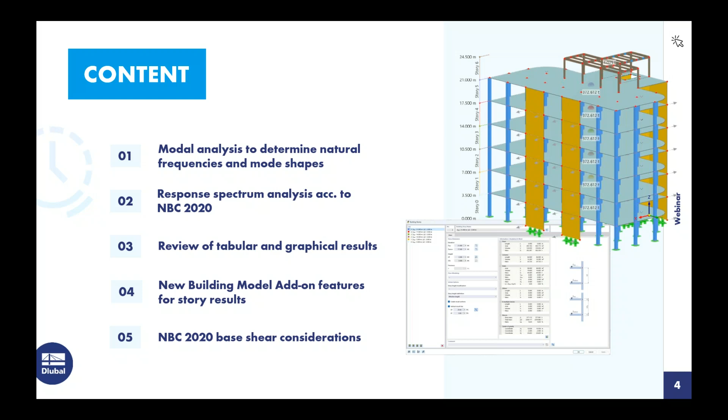And finally, at the end, we will consider the base shear requirements from the NBC 2020 and see how those are related to RFEM 6 and the result output. So before we begin, I want to discuss the NBC 2020 earthquake methods of analysis that are given in Article 4.1.8.7. So we do have the equivalent static force procedure that is provided in 4.1.8.11, and this is certainly a simplified approach for seismic design. Now, this can be applied for buildings that are of seismic category SC1 or SC2, given in Table 4.1.8.5.B.

It also can be applied to regular structures with a height less than 60 meters and a fundamental lateral period less than 2 seconds. We can also apply this simplified approach for irregular structures, and we would refer to Table 4.1.8.6 to see what categorizes a structure as irregular. But the height must be less than 20 meters, and that fundamental lateral period must be less than 0.5 seconds.

Then we have the dynamic analysis procedure in 4.1.8.12, and this includes the response spectrum method, the time history method, or the nonlinear dynamic analysis. And this should really be applied to all structures that do not satisfy the simplified requirements set forth in Article 4.1.8.7. For today, we'll move forward with the response spectrum method for our structure.

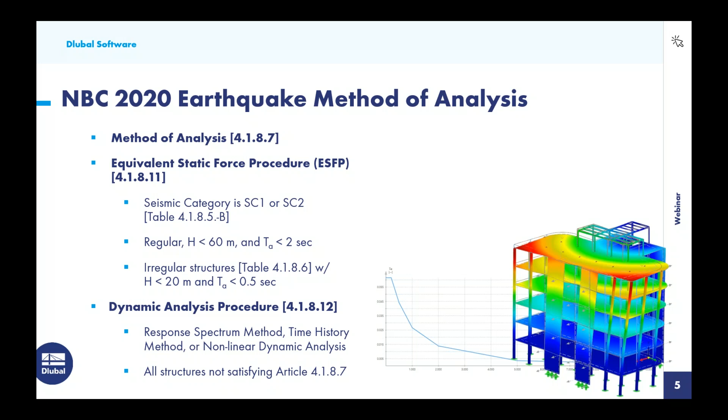So we'll begin in RFEM here, where I have already modeled our multi-level story structure. So we'll quickly go over a bit of the model input as shown over here in the RFEM 6 navigator on the left. So we can see our input materials, and a majority of the structure is defined here as a concrete material with a compressive strength of 40 MPa. But we also have a small steel structure up at the roof level here with a material of A992 steel.

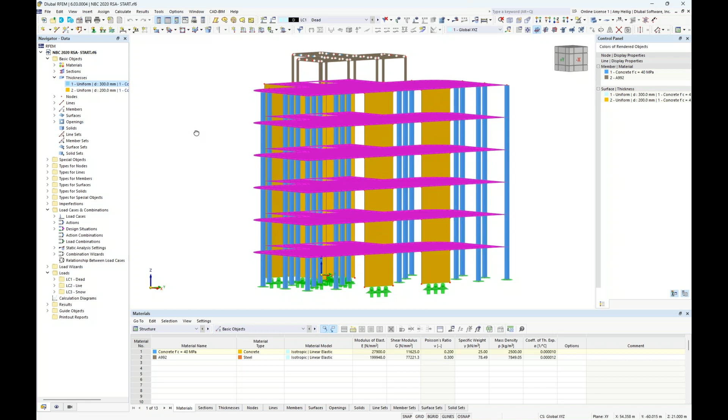As far as our cross sections, you'll notice that our concrete columns that are spanning between floors are just going to be square 350 millimeter by 350 millimeter concrete rectangular sections. And then as far as our steel members, we have several W shapes defined directly from the RFEM 6 CSA library. And finally, we have the thicknesses defined of our surfaces. So this would include our floor slabs here, which are defined with a 300 millimeter thickness. And then we have the thickness of all of our shear walls, which are going to be defined with a slightly smaller thickness of 200 millimeters.

So that's just a basic overview of the structure, but we would also like to take a quick look at the applied loading that, again, I've already added to this particular model. So within our dropdown, we have three simple load cases, all gravity loads. The first is going to be our dead load, and this is going to be a surface area load of 3.5 kilonewtons per meter squared applied at every level.

We also have a live load, with a modified magnitude here of 2 kilonewtons per meter squared, again applied at every floor level. And finally, we have just a general snow load at the top level here of 1.5 kilonewtons per meter squared. So now that we have reviewed the overall structure and the loading, we want to move forward now with our modal analysis.

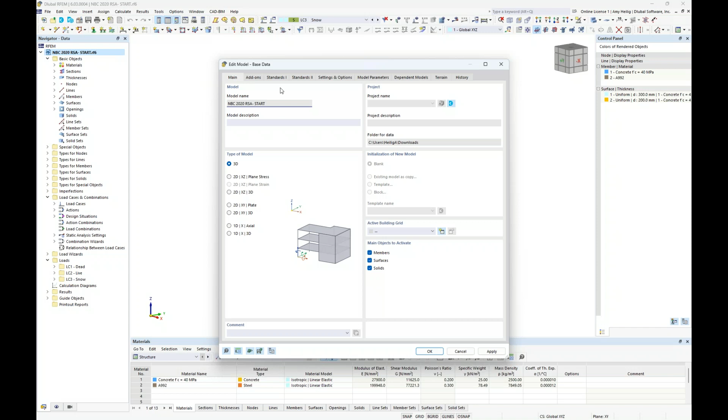So we want to right-click on the model name here in the project navigator to visit what's called the base data dialog box. And this dialog box would be presented to you when you first create a new model within RFEM. But on the second tab are all of our optional add-ons.

So to quickly explain the configuration of RFEM, the base program itself allows us to fully model the structure, including all of the materials and cross sections from the library. We can apply loads and run a basic static analysis. But the minute we want to move forward with design according to the various standards, we would activate one of these add-ons, for example, concrete design, steel design, timber design, and so on. And in particular, today, we want to activate our dynamic analysis add-ons, and we'll begin with the modal analysis.

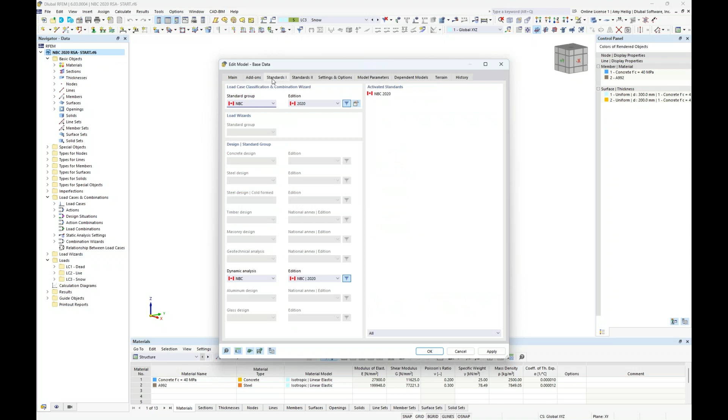So on the third tab, we will generate our load combinations automatically according to the NBC 2020, but we see all of the relevant international standards that are available in the base program as well. And because we have activated now that dynamic analysis add-on, we will go ahead and reference the NBC 2020 here.

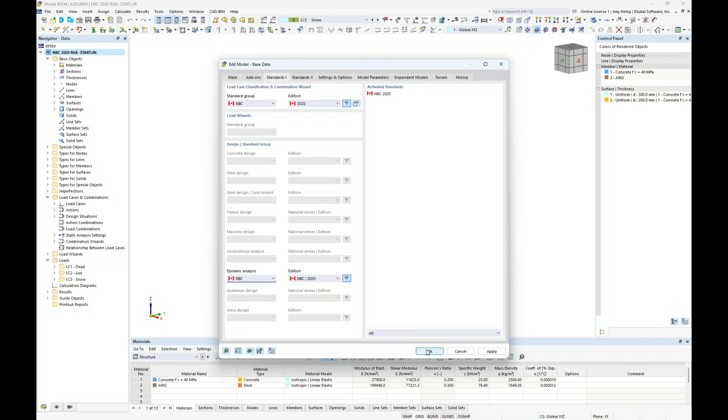So once we have activated that add-on, we will go back into the program and we want to visit our load cases and combinations dialog box. Well, we can immediately pull that up here by editing the active load case. And again, under the load cases tab, we see those 3 simple load cases that we just reviewed, dead, live, and snow, but we're going to create a 4th load case. And the load case name is going to be modal analysis.

Now, because we have activated that add-on, you will notice here that within the dropdown, we now have a new analysis type called modal analysis. And this is only available because we have activated that add-on. So you'll also see a lot of these settings immediately modify in comparison to the static analysis. The first thing to take a look at is the modal analysis settings. So we'll go into the edit dialog box here and we have a couple default options.

The first input is the method for determining the number of modes. So this is by default set to user defined, where we can directly put in the number of mode shapes we would like to solve for. And for today, I'm going to increase this to 10, but you can solve for 10, 20, 50, 100 different modes if you prefer. The alternative method in this dropdown is automatic to reach a maximum natural frequency. So you'll notice that we can input the maximum natural frequency and the program will determine the number of modes needed to reach that particular value.

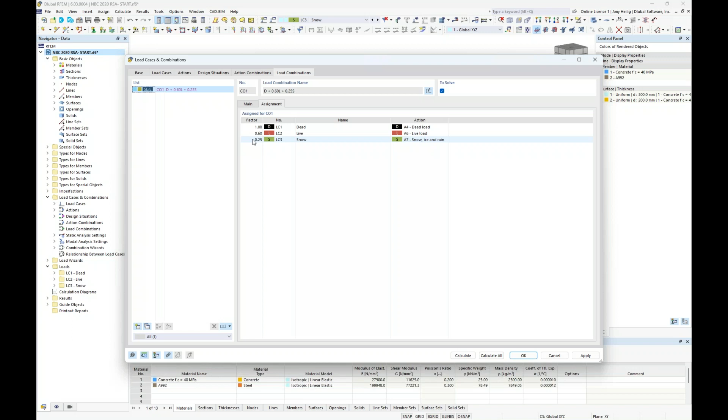And now when we jump to the load combinations, we will see all three load cases considered with the relevant factors directly from the NBC. So 100% of the dead, 60% of the live, and 25% of the snow. So jumping back to our load cases and under the modal analysis, we can now use our drop-down box here to select that mass combination. So now these relevant load cases will be converted to mass.

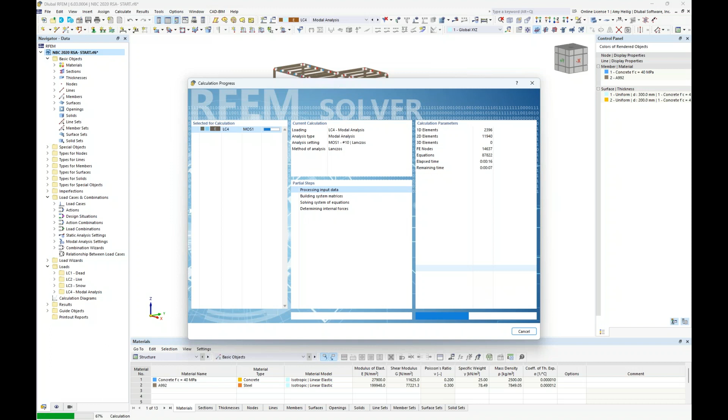Okay, we're now ready to run the calculation, so we can simply hit calculate under this particular load case modal analysis. The program will generate our FE mesh for us, and we are going to calculate a total of 10 different mode shapes. Remember, this is the input that we have input into the particular modal analysis settings. We will also consider the mass conversion of the particular mass combination that we have also set.

So when that calculation is done running, we can take a look at our results. And over on the left, we now have a fourth tab available in the navigator. And within our dropdown, we see here 10 different mode shapes that we can actually cycle through to see the response here of the structure.

So currently we're viewing the mode shape, and notice at the very bottom here, we have the ability to scale the mode shapes. Now the default option is set here so that the magnitude of the mode shape vector is set to a value of 1.0. That's why we see a max value here of 1.0.

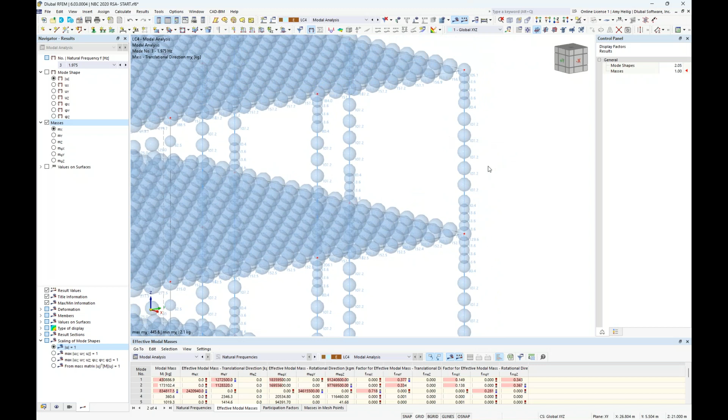But there are some different options we can easily toggle to if we prefer, but most likely we'll be utilizing this first option. So in addition to viewing the mode shape here, you'll also notice the ability to take a look at the masses on the structure used for this modal analysis. And if I zoom in here, we can actually see the mass magnitude at every single FE mesh point that was used in this calculation for our members, our floor slabs, and also our shear walls.

So in addition to the graphical output, we certainly want to visit the tabular output here. So once this calculation is complete, we should also see the ability within our dropdown to jump to the modal analysis add-on to view our results here. And the first tab under the natural frequencies includes those 10 different mode shapes as well. So we can kind of cycle through these by clicking in the table, and notice the graphics will automatically update.

But this allows us to view the angular frequency, the natural frequency, and the natural period of our structure for those 10 different modes. Now, it's really important to also take a look at the effective modal masses. And within this is going to show us our mass participation for each mode shape. Well, we can immediately tell what our dominant modes are here, just based on the most mass participation. So mode shape 1 would be our dominant mode in the Y direction. And we can also view mode shape 3 here, which would be our dominant mode in the X direction.

And down at the bottom of this table, we will actually get a summation here of the mass participation. So in the X direction, we have 72%, and in the Y direction, we have 89%. Well, if we refer to the NBC commentary, and currently only the 2015 is released, we don't have access yet to the 2020, but I would imagine it would say the same thing, in that a 90% mass participation is required for this modal analysis. And we're certainly not reaching that with these 10 different mode shapes here.

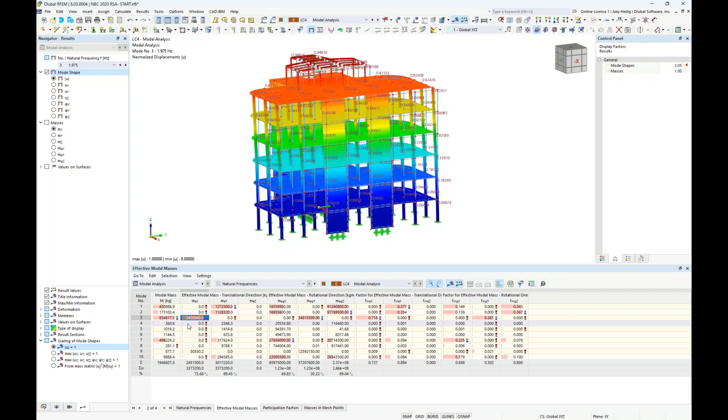So the question might be, well, what steps can we take in order to ensure that we're meeting that 90%? The obvious and most easy is probably just to solve for more eigenvalues. Maybe we set this to 20 or 30 in order to see at least that 90% in both orthogonal directions. Alternatively, if we take a look here at mode shape number 4, for example, you'll notice that really not much is going on with a majority of the structure. Rather, we're seeing a response up here for these smaller steel members only.

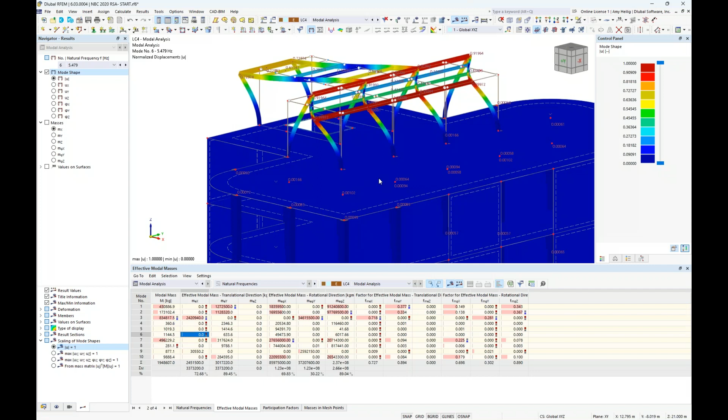Same concept with mode shape number 5 and mode shape number 6. So we term these usually as local modes, where again, not much mass participation, but we're seeing very little response for just maybe a few members. So I'd really like to eliminate these local modes in my calculation. And we're going to go back to the modal analysis here and revisit these settings.

Under the Settings tab, remember we have this currently set to no neglection, but what I would like to modify this to is to user defined, where I now have an additional third tab here to neglect masses of a particular object that I select within this dropdown. And for today, I'm going to deactivate the masses for all of my steel members located at that top level.

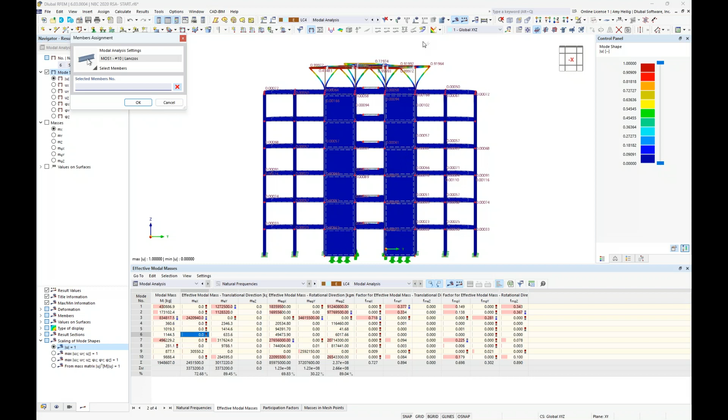And I can graphically select the steel members here. I'll turn off my results. Maybe I turn this into a rendered view by graphically using my selection box here to highlight all of the steel members. Now notice the member numbers are automatically populated. So now we're going to completely neglect the masses for those particular elements.

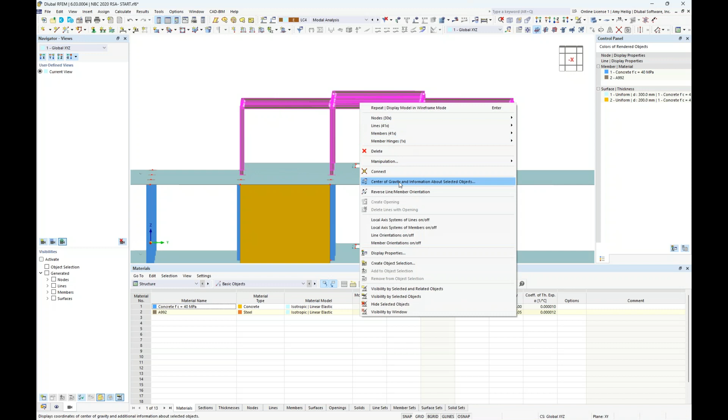But if we would still like to consider the masses and maybe just redistribute to a different area of the structure, we can do so. So if I highlight all of these same members, again, these steel elements up at the top, I can right click to take advantage of this option here called center of gravity and information about selected objects. And what you will notice is that the program will give me the total mass here of the selected objects, 3.075 tons.

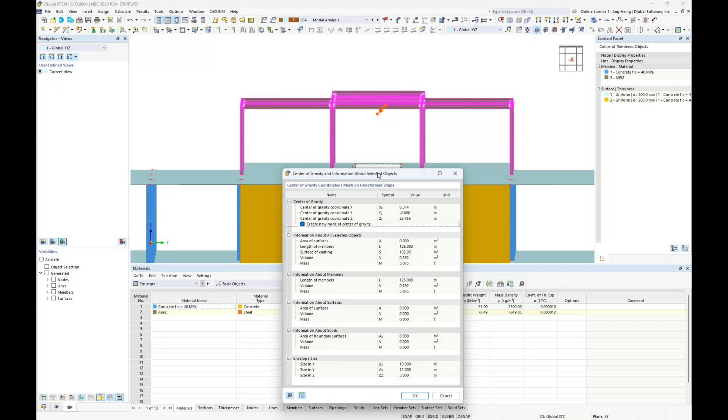Well, I can take this a step further to generate a new node at the center of gravity with the selected objects, and we see that generated here in the background. So once I've created that additional node, I'm actually going to double click on it because I want to modify the Z elevation here to 21 meters. And by doing so, I just have simply moved this node to the top story here of the concrete structure itself.

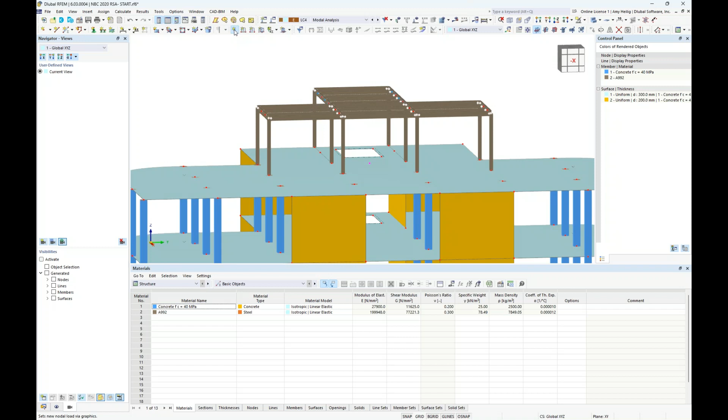Well, now we are going to apply a new nodal load. So I choose my option directly up here in my quick tools up at the top. And instead of the load type set to the standard force, we do have the ability to set a mass load type. And again, taking into consideration the total mass of those selected steel objects, I'm going to simply redistribute it here at 3.075 tons.

And I'm going to apply it to node number 491, or we could graphically select that node. But we do need to make sure that we are under the relevant load case here. So we want to apply that to the dead load case. So when I click OK, the program asks me to delete the results, and we turn this into a rendered view here. And now we see that mass load applied directly to that node, again, at that top slab here

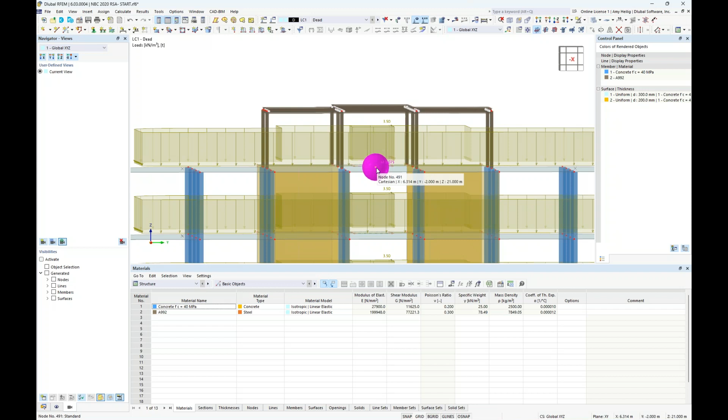of our concrete structure. So we have the ability to apply mass loading as nodal loads, as we just saw, or line loads, member loads, or surface loads to be considered further within the modal analysis directly. So we jump back down here to the modal analysis.

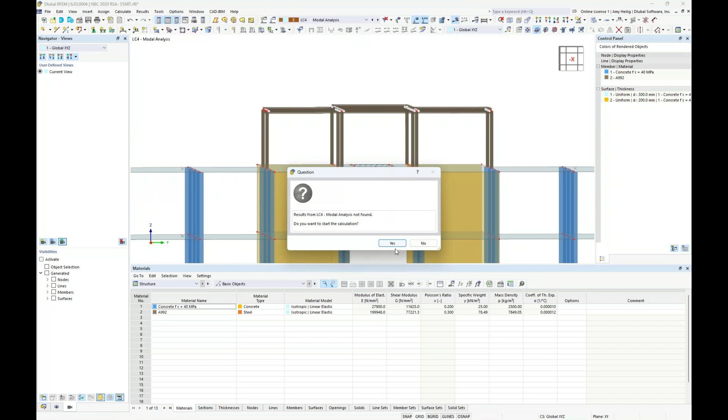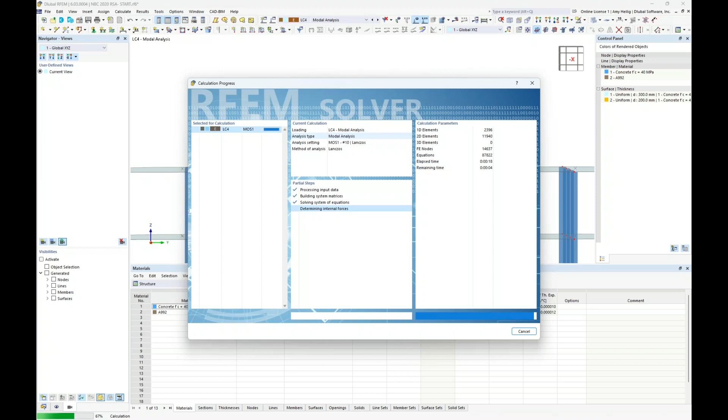We're going to rerun this calculation, and remember now that we are completely neglecting the masses from the steel members, but rather we have now inserted that single point mass load at the top of the concrete structure to simply redistribute the mass. And our hope is by still solving for 10 different eigenvalues that we see slightly better mass participation. So once the results are finished here, we can go ahead and zoom out to see the overall structure. We're currently looking at the modal analysis add-on and the effective modal masses tab.

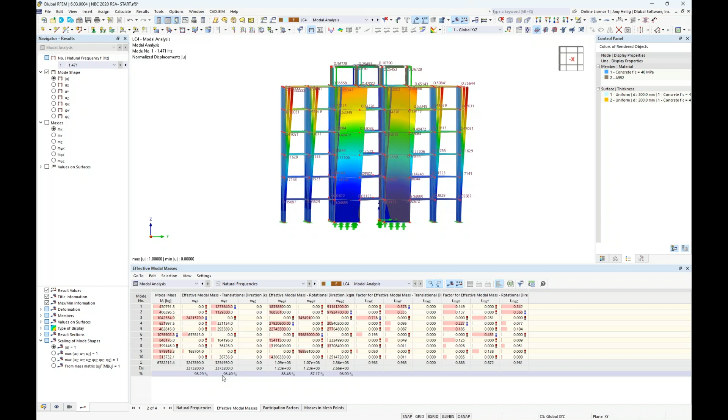And we take a look at the bottom here for the summation of the mass participation. And now we have 96% in the X direction and 96% in the Y. So you can see by eliminating those local modes, we don't need to solve for more eigenvalues, but rather what we see here for mode number 4 and mode number 5, where previously not a whole lot was going on for the rest of the structure, actually look quite good now with a response of the overall structure instead.

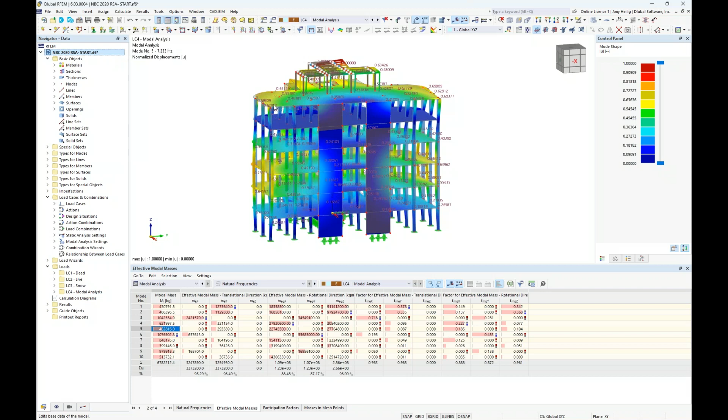Okay, so now that our modal analysis is complete, we have met those 90% mass participation requirements set forth by the NBC. We want to move forward with a response spectrum analysis. So we will go back to the navigator and the first tab here to revisit our base data dialog box. And under the add-ons, you can see that we also have the ability to activate our second add-on, response spectrum analysis. And under the standards, we're making no modifications here.

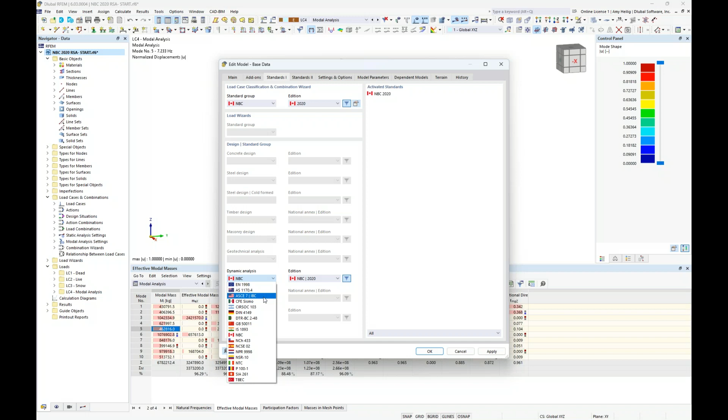We're still running that response spectrum analysis according to the NBC 2020, but I just wanted to point out all of the other international standards that we have available, including the ASCE 7, the Eurocode, and several other international standards. So we'll go ahead and click OK to get back here within the model where we will revisit our load cases and combinations dialog box.

So we will create a fifth load case here, and this one is going to be called RSA for Response Spectrum Analysis Design. Within our drop-down box, we now have a third option available to us, the response spectrum analysis. Now, before I get into some of these settings here on this first tab, I'm going to go ahead and go over the additional tabs.

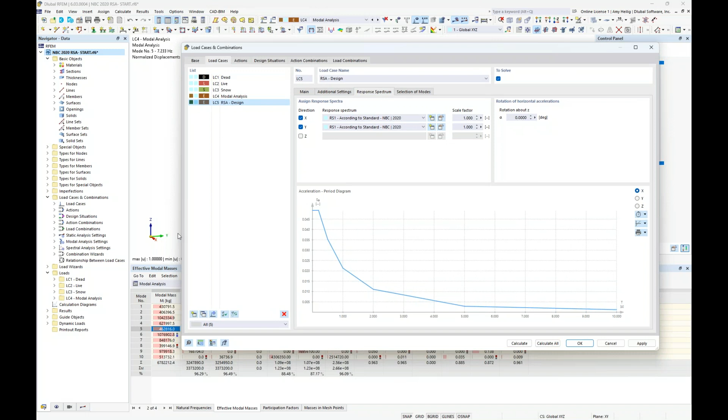As far as additional settings, this is actually not something that you need to worry about with a response spectrum analysis. With that dynamic add-on, it's really more relevant for a static analysis. So we'll go ahead and make no changes here. Under the response spectrum, we are interested in applying this response spectrum in the orthogonal X and Y directions. And this is just based on these global axes here in the background of the RFEM model directly.

Now, of course, if we were also interested in a vertical seismic response spectrum, we would activate the Z direction as well. The program has automatically set a response spectrum definition type here according to the NBC 2020, but we can go ahead and edit the settings within this particular definition type. So as far as generating this response spectrum, we have several options within the dropdown.

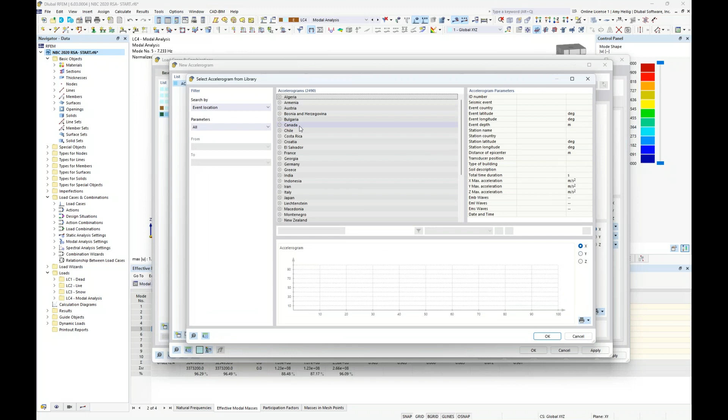The first is user-defined, where notice that you can input directly the period, the frequency, the acceleration, and this diagram will be automatically created based on this input. Alternatively, we have the ability to consider from an accelerogram. So with the accelerogram, we can take a look at the RFEM library directly, where we have several recorded earthquake events from all the various countries, including Canada here. So we could select one of these particular accelerograms to be considered for our response spectrum analysis.

Now, finally, the last option here is according to the NBC 2020, which is what we'll be moving forward with today. Now, it's very important to note here that under the spectrum type, we have two options, the elastic and the design. We'll actually touch on this at the end of the presentation today, but for now, we want to choose the design spectrum. And once we have set the spectrum type, we do need to input several variables here, including the spectral response acceleration for the various periods.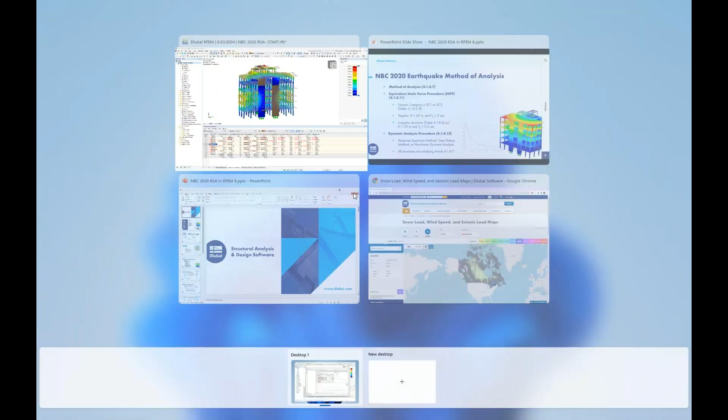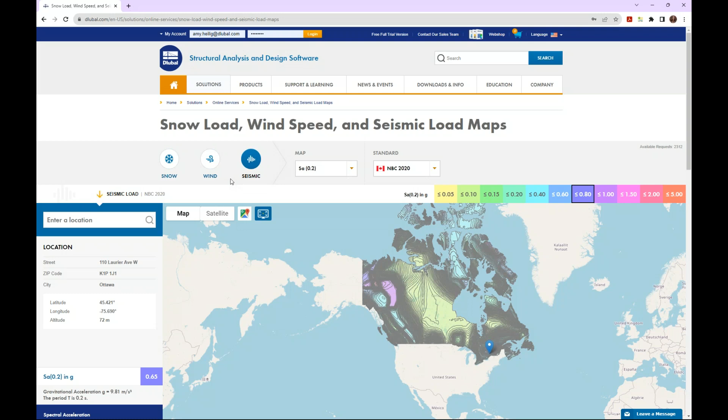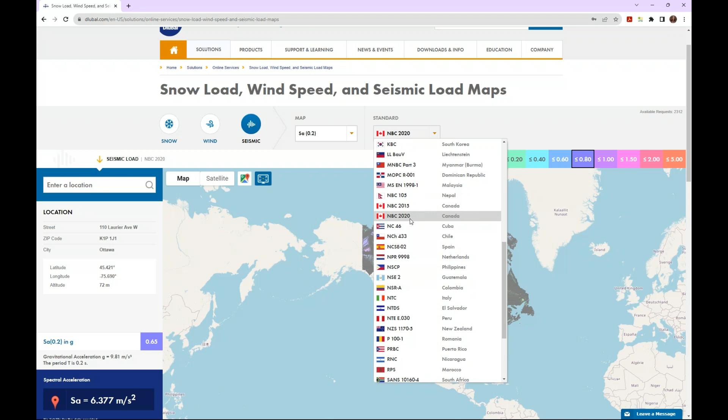Well, I wanted to point out that if you do visit our website at dlubal.com, under solutions, we have what's called the snow, wind, and seismic load maps, or in other words, our geozone tool. So you can see the various hazards that we can select at the top here. And for today, I have selected the seismic. And we also have implemented multiple standards from around the world, including the ASCE 7, of course, the NBC 2020, and all of the rest of the standards available here.

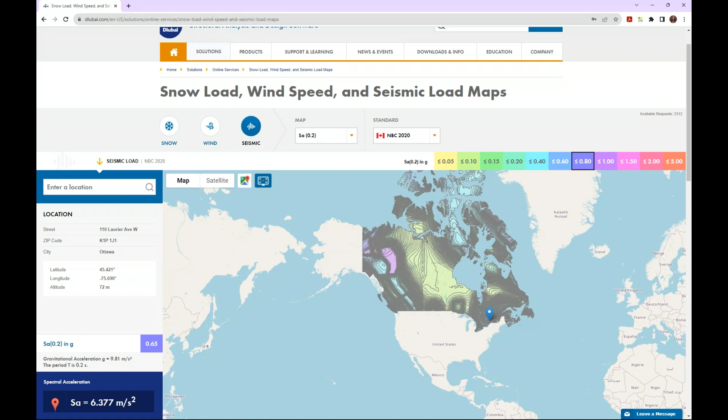So once we have selected our standard, this is also integrated with Google Maps technology in the sense that you can simply input your project location, such as an address or perhaps a city. You can go ahead and select as well within the drop-down these several options that are needed for a response spectrum analysis, and the program will instantaneously return the correct information to you, again, based on the NBC. So maybe a little bit more efficient than flipping through maps. So certainly take a look at this GeoZone tool available on our website.

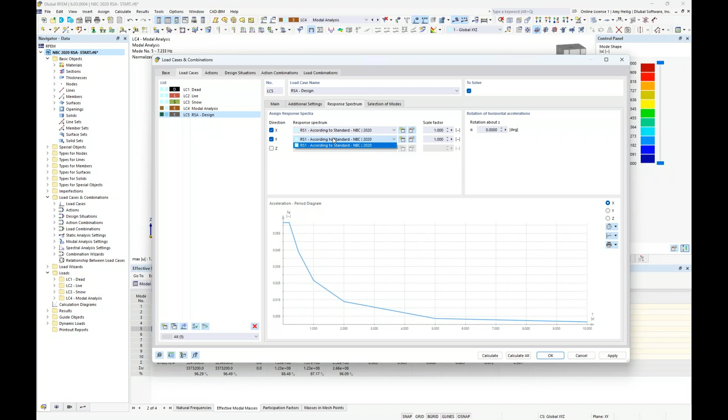So we go ahead and click OK, and we want to ensure that that response spectrum is applied in both the X and the Y directions within this dropdown. The final tab here is the selection of modes. So what you'll see listed are the 10 different eigenvalues that we solve for from the modal analysis. And what's nice is that we also get a nice summary here of the mass participation in the X and Y directions. So 96% in both the X and the Y directions, as we have already taken a look at the previous results back in RFEM.

Well, if we are interested in deactivating some of these mode shapes with very little mass participation, for example, if we set this to 4%, notice that a couple of these modes are deactivated, yet we can still double check to make sure that we're still meeting this 90% requirement, and sure enough, 96% in the X and now 94% in the Y. This just allows us to maybe speed up our calculation quite a bit without having to worry about some of these mode shapes that are not contributing much to the mass participation of the overall structure. So in this case, modes number 8 and 10 will be unchecked here.

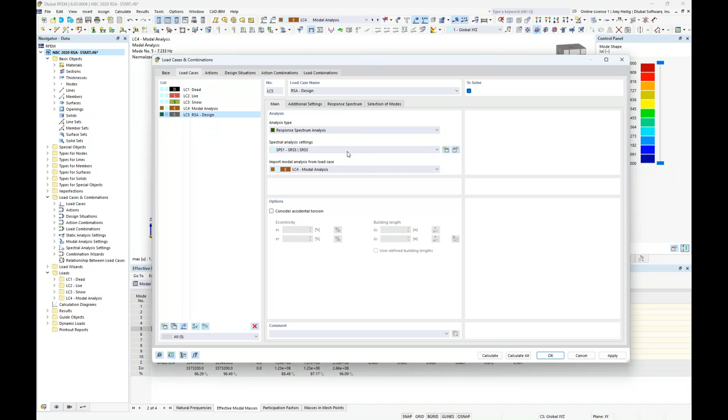So now that we are complete with these additional tabs up at the top, we go back to the main tab to talk about these spectral analysis settings. And again, by default, we do have a definition type set here. This will allow us to set the modal combination method for the periodic responses, and we have 3 different options available. We can take into consideration damping for the CQC rule, and we also will need to set the combination of the directional components, again with 3 different options available here.

So this is a really important topic, therefore I'm going to jump back to the PowerPoint to explain this in more detail. So we'll begin first with the modal combination method, and that's that first drop down available to us. So I'm going to jump ahead here in this PowerPoint to what you would ultimately see in your result output once we do run this response spectrum analysis. So remember that we're solving for 10 different mode shapes, or maybe we've deactivated a couple of those.

So we're going to apply this response spectra analysis in both the X and the Y directions for all mode shapes selected. However, we need to somehow combine these so that we get a single response in the direction X and a single response in the direction Y. And within this dropdown, we choose the method of how these will be combined.

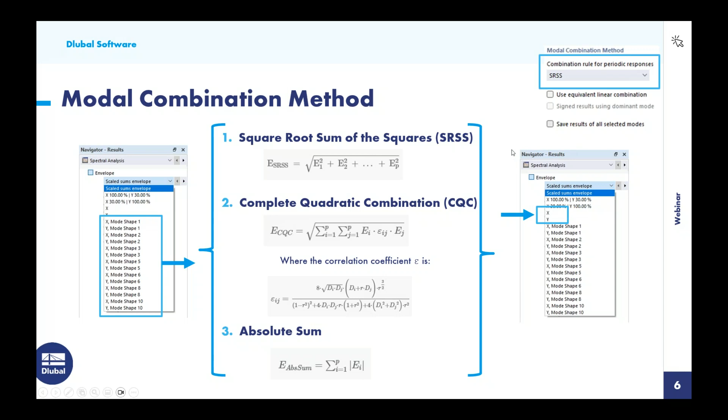So the standard SRSS and CQC combinations, those first 2 methods that we were talking about, inevitably we're going to lose the corresponding internal forces. And what I mean by this is that if we take a look at, for example, a column's max axial force, we'll lose the corresponding moment in the results when we combine these. This is why we have an additional checkbox option right below this called the equivalent linear combination. And this will essentially give us a more realistic result as well as the correct signage.

So taking a look at the square root sum of the squares, SRSS, with this option checked, we see the modified equation shown here. Very similar, we have the CQC with the linear combination checked. Again, we'll see how these formulas vary slightly from the formulas shown on the previous page without the equivalent linear combination activated.

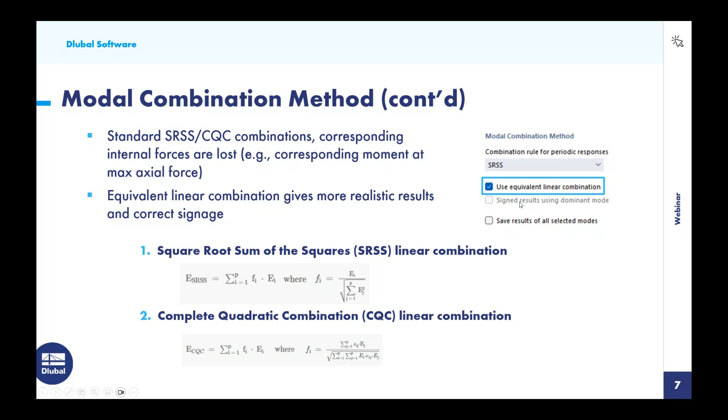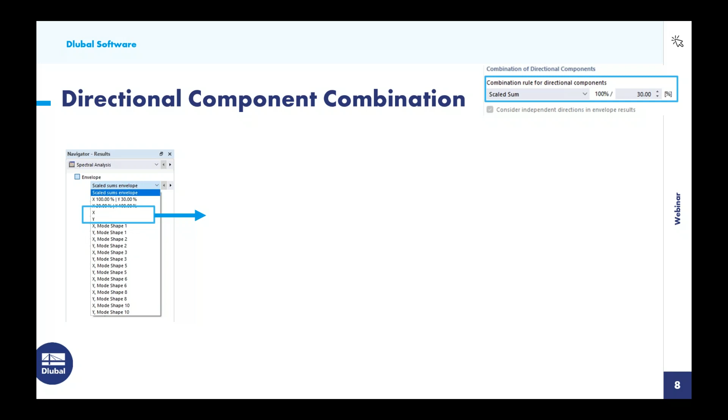And finally, we have our final dropdown within these options for the directional component combination. Well, we now have a single response in the X and a single response in the Y, but we know that earthquake loads don't necessarily always act 100% in the X direction of our structure or 100% in the Y direction, but rather it's usually a combination of both. So the question is, how are we going to further combine these for our eventual design of the structure? And again, we have three different options here.

The first is going to be the SRSS rule once again, where we square them, take the sum, and then take the square root. The second option, and probably the more common approach if we are designing to standards such as the NBC, is the scaled sum or the 100%/30% rule. This is where we are going to consider these independent directions, but we're going to take 100% of the X and add it to 30% of the Y. Now, if we were also considering a vertical seismic in the Z, we would additionally add 30% in the Z. And we'll create a second result here with 30% in the X plus 100% in the Y.

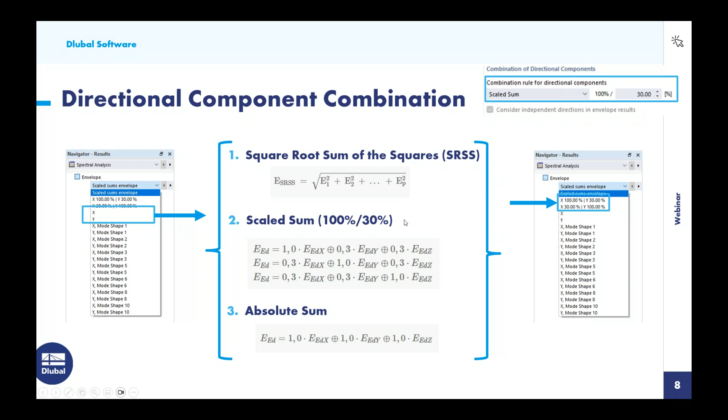Now, the final option for this method is the absolute sum, and this is just simply where we are going to add 100% of the X to 100% of the Y and possibly 100% of the Z. So again, the most conservative approach there. But assuming we move forward with the 100%/30% rule, which is exactly what the NBC calls out if we refer to Article 4.1.8.8.1(c), we should see two results further output in our results for the response spectrum analysis, exactly as we just discussed here, in both orthogonal directions.

Okay, so let us go back to RFEM yet again to choose the combination rule here. Just notice that when we have the CQC selected, we now have the ability to set that damping ratio here on the right-hand side. But today we'll move forward with the SRSS with the equivalent linear combination. Now, the signed results using the dominant mode, this is currently grayed out. We determined that with the way that the response spectrum analysis is carried out, there could be results that are unconservative if we were to apply this method here.

So instead, in the near future, what we plan to do is to explore the option of exporting out the equivalent loads from the seismic response, and then we could certainly take advantage of options such as this for the signed results. But for now, you'll see that disabled.

The save results of all selected modes. Remember, we're combining all of our mode shapes in the X and Y direction according to the SRSS. This just simply allows us to view the structure's results, including deformations, internal forces for each mode shape as well.

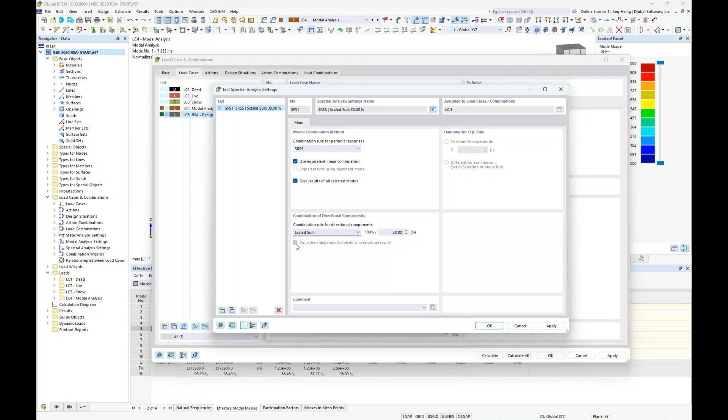The combination of directional components, as mentioned, we will refer to the NBC to set that 100%/30% rule. You see a checkbox activated here in the background. This just means that ultimately in our results, we will give you an envelope solution. So the max and min results for the 100%/30% rule, but we will also consider 100% in the X and 100% in the Y in those envelope results as well. So this is checked by default.

So once we have set this information under these particular settings, we want to import in the modal analysis from the load case. Well, we've only run one modal analysis for today under load case 4, but we could create multiple load cases for different modal analyses, and why this might be beneficial if we were making some experimentations with different mass combinations, neglecting masses, or whatever it may be, we would have the ability here to select a different modal analysis.

And finally, we have the consider accidental torsion. So for this, we refer to the NBC Article 4.1.8.12.4 that tells us we do need to consider accidental torsion in our response spectrum analysis. And we do so by setting here 10% in both the X and the Y directions. And this is based on the building length in both of these orthogonal directions.

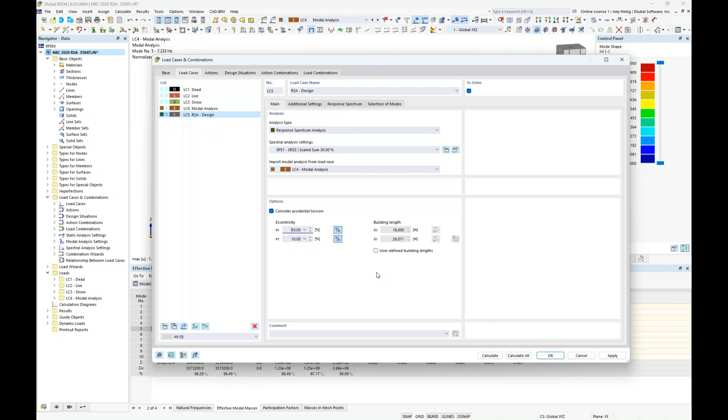And notice the program automatically calculates what this building length is, but if we would like to override that, we could certainly do so. But essentially, internally with our response spectrum analysis results, an additional moment will be applied at every single FE mesh point to consider those code requirements.

So we are now ready to run our calculation once again. You'll notice here that we have several input options that it's solving for load case 5 here for that response spectrum analysis. And this is just simply because we are considering all of the 10 different mode shapes, except for the 2, of course, that we deactivated, in both the X and the Y direction, applying that response spectrum analysis to each mode shape, and then combining according to the relevant settings that we just discussed within the PowerPoint.

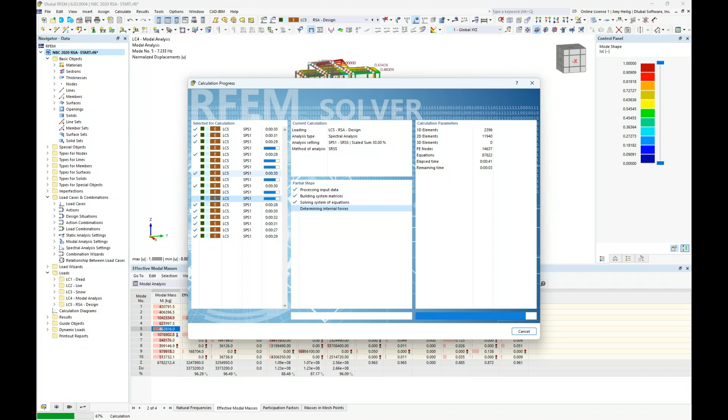What else is new within RFEM 6? You'll notice that these are being solved simultaneously, taking advantage of the multi-core processor within your computer. Previously in RFEM 5, it would require each of these calculations to be run one by one.

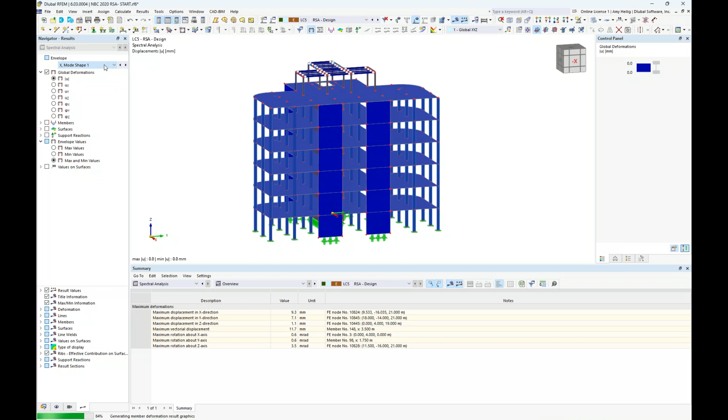So now that the calculation is complete for the response spectrum analysis, we will jump yet again to our navigator here to this 4th tab where we see our results within this dropdown. And just like what we were discussing within the PowerPoint, we have all of the various results here for the individual mode shapes in both the X and the Y directions. But we also have 100% in the X, 100% in the Y, and we have the combined 130%.

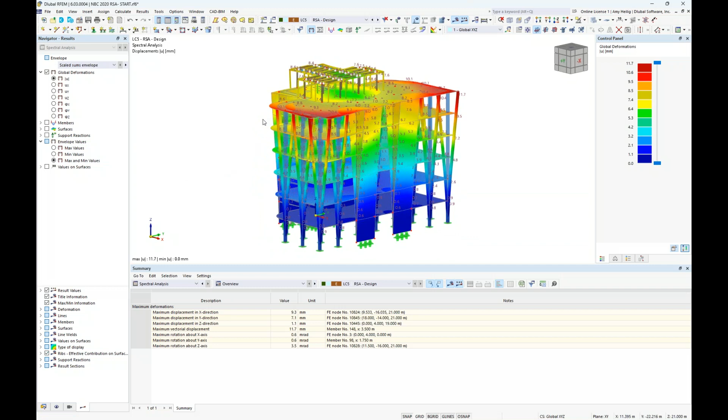And finally, we have the scaled sums envelope, and this is going to be that envelope solution that includes the 130% rule, but also 100% in the X and Y. And you can see the envelope values can be activated here. Currently, we're looking at the max and min values. That's why we kind of see duplicate results here for our deformation, but we could set this to the max values only or the min values only, or keep this as both.

But in addition to the global deformations of the structure, we can also view information such as the member internal forces. So perhaps I change this to the max values only, and I'll change this to wireframe view. We can view the maximum axial forces in our columns from our response spectrum analysis, or the shear forces or bending moments.

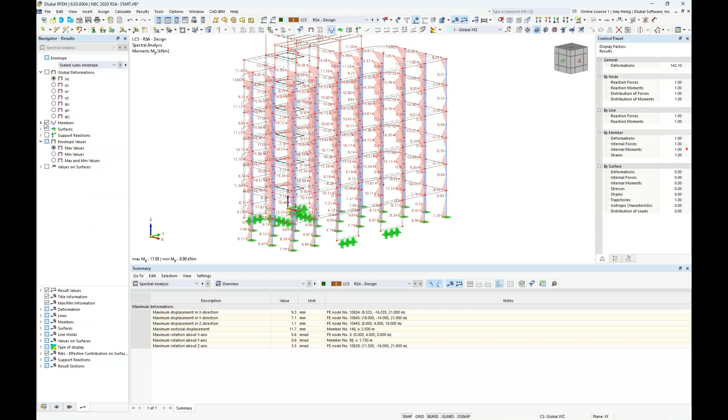Same concept here for our surfaces. We can activate the bending moments. We can also activate the color navigator over here. We can take a look at shear forces or those normal forces within the structure for those particular surfaces.

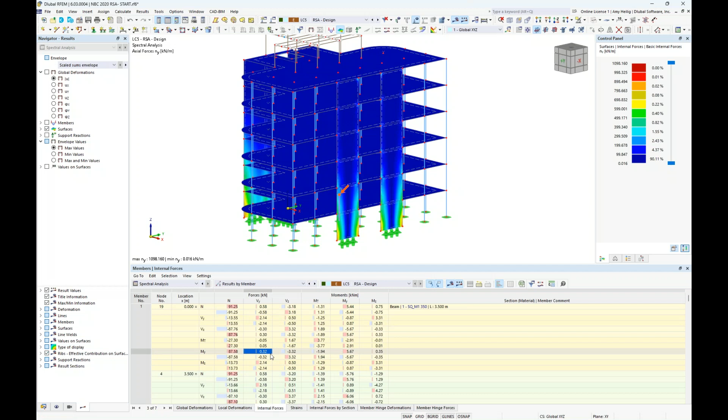Now, all this information shown graphically is also available in table format, similar to our modal analysis, but this time we jump to the spectral analysis add-on, and we can view here the results by member. So information like those internal forces for each individual member, and we can go ahead and turn off our surfaces here. Notice that everything is synced up in the background to show me exactly which member I'm currently looking at. We can export this to Microsoft Excel if we're interested in further sorting capabilities. Same concept here for the results by the surfaces as well.

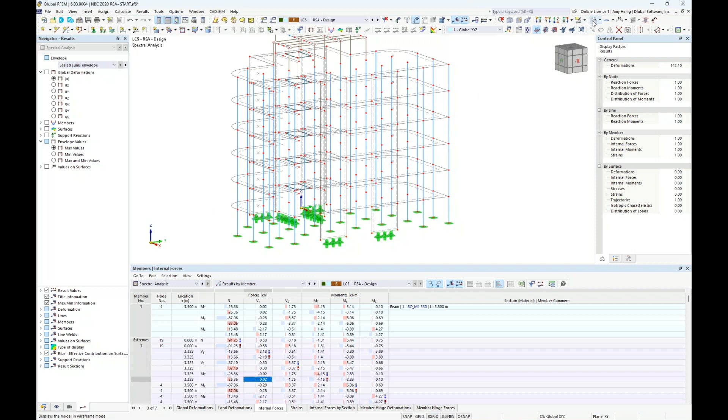So a very important result interpretation from the response spectrum analysis is, of course, the topic of base shear or story shear. And previously in RFEM 5, what we needed to do in order to get this information out of the program was to typically take one of these column stacks here to make a copy of it. Then we would move it over here to the side of the structure, change the member type to something called a result beam. And the result beam would then sum up all the internal forces here for all of the selected objects.

But now in RFEM 6, we actually have introduced a new add-on called the building model add-on to better organize this result output with the response spectrum analysis. So we'll go back here to our base data by right-clicking on the model name. And similar to what we saw here with our dynamic analysis add-ons, we can now activate the building model add-on.

So keep in mind that RFEM is a nonlinear general FEA program. This means that yes, of course, we can model, analyze, and design buildings, but we also can model domes or silos or fabric tensile structures, or maybe it's an FEA of a steel connection. All of these different model types are possible. So what we're hoping to do here with the building model is to integrate more of those building specific features within a general FEA program.

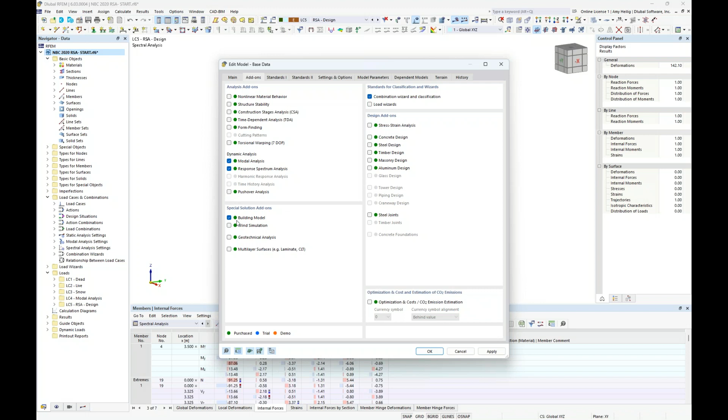And this includes topics like diaphragms, shear walls, spandrels, and I will refer you to the webinar that I presented last month on concrete design according to the CSA A23.3, which is on our website and our YouTube channel, where I actually go into a little bit more detail than what we have time for today with this building model add-on. But for today, we will go ahead and activate this here. And ultimately, what many other software companies are doing with two separate programs, with FEA as well as building specific, we're trying to integrate into a single program with RFEM.

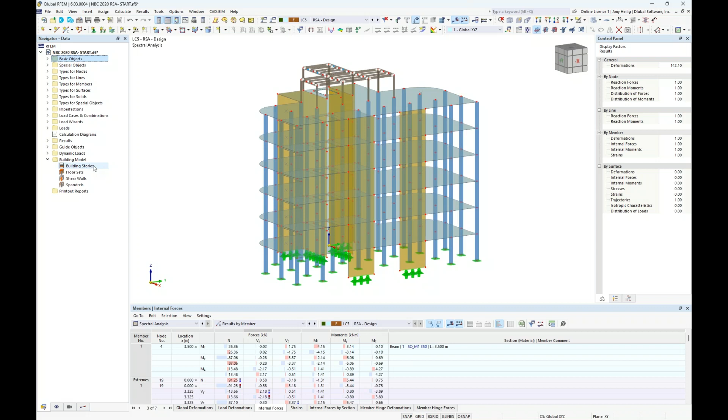Now, at first glance, it appears that not much has changed when we have activated that building model add-on, but I'm actually going to right-click here in one of my folders within my navigator to collapse all of them, just so it's a little bit easier for you to see that we now have a new folder option here called building model. And what we need to define are the various building stories for our structure today. And we do so by right-clicking to create a new building story. The first story is by default automatically created here, but we do need to tell the program what's the base of this story and what's the top of the story.

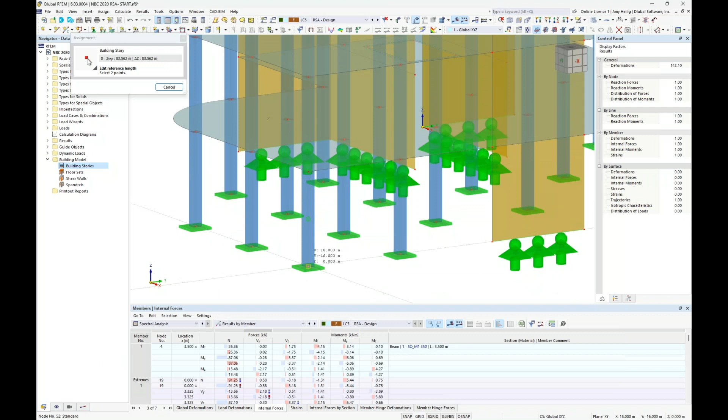And we can do so by graphically selecting 2 points. So I'll scroll down to the base of the structure to select this point at the bottom. And then my second click is going to be at this first story height. And actually, let me click that again. Looks like I had toggled to a different point. So we see a total height here of 3.5 meters. Now, I want to also point out that over on the right-hand side, we have a nice table format that includes all of the information such as area, the length, the volume, the mass for all of the objects at this particular story level only.

We also have the ability here to define a rigid diaphragm or a flexible diaphragm. Semi-rigid diaphragms are also currently in development and will be released at some point in the future. Now for today, we won't define any diaphragm. We're just going to keep this as the standard surfaces that we already have modeled in RFEM.

We want to continue adding the additional stories by doing so with our button in the lower left-hand corner here, all the way up to story number 6. So the program automatically assumes we have the same story height of 3.5 meters at each level. If you did need to modify that, you could certainly do so. But again, all of the relevant information for this particular story will be displayed on the right. And now when we click OK, if we zoom out here and we kind of rotate the model around, notice that we have a graphical output of each story level shown, clear up to including the steel structure up at the top.

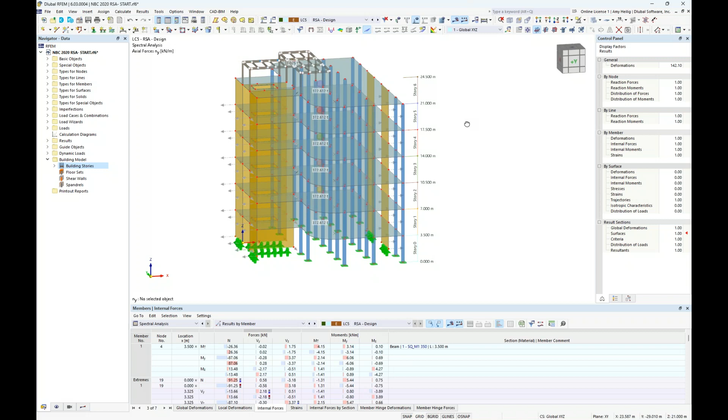So with the results from our response spectrum analysis, the only thing that we need to do here is to revisit our spectral analysis option within our first dropdown, but we now have a new result option called results by story. So I don't need to rerun the calculation. The program just automatically sums up the results that I already have.

And now we see under this first tab, probably the most important information related to that response spectra analysis is our story shear presented at each level. So we're seeing the max and min shear force in both the X and the Y direction, again, output at each story. You'll also see the location of the resultant story force shown here with that red arrow. And we would probably take a look at the base of our structure to determine what that base shear is, again, from that NBC response spectrum analysis.

The second tab is the inter-story drifts, so we can view the drifts as well at each story level. Again, previously in RFEM 5, this information was a little bit more difficult to get out, but now in RFEM 6, with this building model output, we can directly see this at each story level.

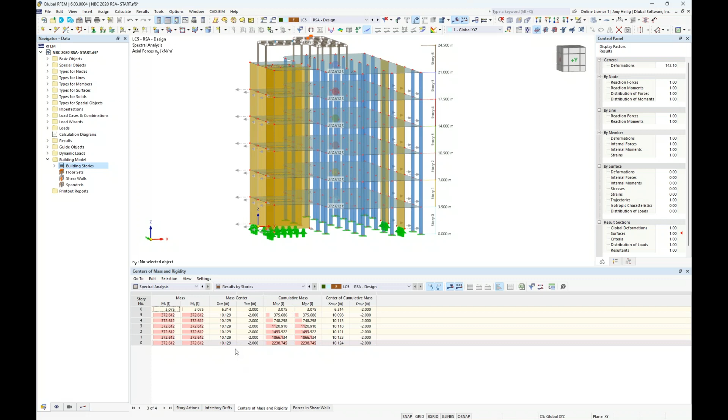The centers of mass and centers of rigidity are displayed here within table output under this third tab, so we can see centers of mass are actually also displayed here with these particular round circles shown here, or this mass ball at each particular level. Centers of rigidity would be available if we had rigid diaphragms defined, which we don't for this example.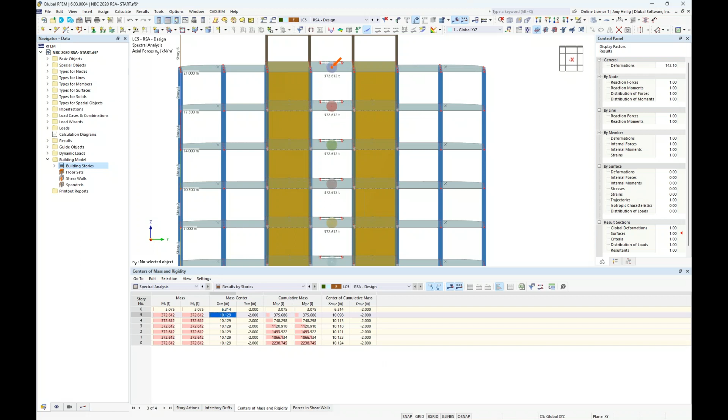And the final tab is the forces in shear walls. So we can actually sum up all of the internal forces for these vertical shear walls at each story level as well. So going back to the base shear, I want to switch back over to the PowerPoint to explain the requirements from the NBC 2020 when we are talking about base shear.

So let us begin with just a basic overview of some of the shear variables that are defined within the NBC. And we begin here in Article 4.1.8.12.5, where we can see that the elastic base shear from the dynamic analysis is denoted here with V sub E. So this is purely the base shear with no factors applied to it. We then have the adjusted elastic base shear in 4.1.8.12.6, and this is V sub ED.

Well, this adjusted elastic base shear is actually calculated with this factor shown out here in front multiplied by the elastic base shear V sub E. And this factor isn't always applied to the structure. There are certain criteria when you should apply it to your particular building. You'll also notice that we need to take the max of the equation shown here on the left versus the equation shown here on the right, but both of them should be less than or equal to 1.0.

Well, moving on in the NBC, we then have the specified lateral earthquake force from 4.1.8.12.7, V sub D. And V sub D is calculated by taking that adjusted elastic base shear and multiplying it by the variables including I sub E, which is the earthquake importance factor. And we further divide here by R sub D, which is the ductility related force modification factor, multiplied by R sub O, the overstrength related force modification factor.

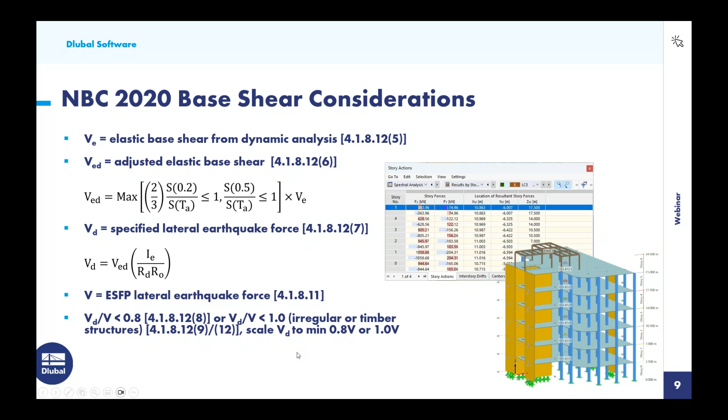So the question might be, well, with all of these different base shears, what is RFEM giving me? So on this next slide, let us talk about the result output from the response spectrum analysis. If you remember, when we created that response spectrum analysis definition type according to the NBC, we had set the type to design spectrum. And with the output that we have seen up until this point in our RFEM example, this is actually giving us our base shear for the specified lateral earthquake force V sub D set forth in Article 4.1.8.12.7. However, I do want to clarify it does not include that additional factor from 4.1.8.12.6.

Again, there is just specific criteria on when that factor needs to be applied versus when it should not be applied. So we have left that up to the user. However, it does include the factor I sub E over RdRo from 4.1.8.12.7. So this is ultimately the information that we're getting in the base shear building model add-on results with the design spectrum type.

If you also remember, I had mentioned there is the elastic spectrum type that we haven't seen so far, but that is the additional option within the dropdown. This is going to give us the elastic base shear, V sub E, from 4.1.8.12.5. So it includes no factors at all, including that I sub E over RD times RO.

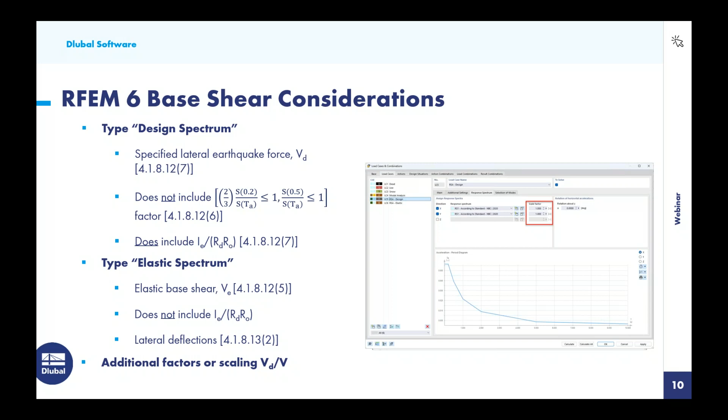So let us go back to RFEM here, and I'll quickly show you how we can consider that elastic design spectrum. So going to our load cases and combinations, I'm going to make a complete copy of load case 5 here. And instead of my response spectrum analysis for design, I'm going to rename this to elastic. Now, all of the previous settings are also copied over, so I don't need to make any modifications to this. But under the response spectrum type, I'm going to edit the definition type here to also create an exact copy of my existing response spectrum definition. And up at the top, I'm going to modify this to elastic.

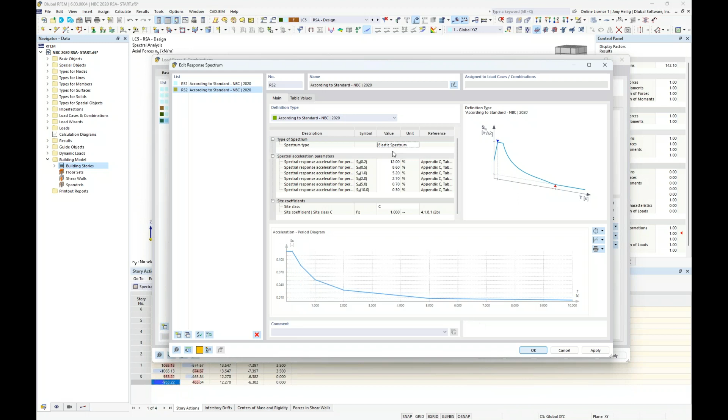Now notice that a lot of the input criteria is now gone, and that's again because we're not considering those additional factors here with our response spectrum analysis with the type elastic. So now that we have this second definition type here for elastic, I can simply select it in my drop-down box. And we would rerun the calculation. We would take a look at the building model results, and in particular, the drift, to make sure that our drift is limited to what Article 4.1.8.13 has set forth. No need to run that calculation now. It's really the exact same workflow. I just wanted to show you how we can essentially consider that elastic response spectrum analysis.

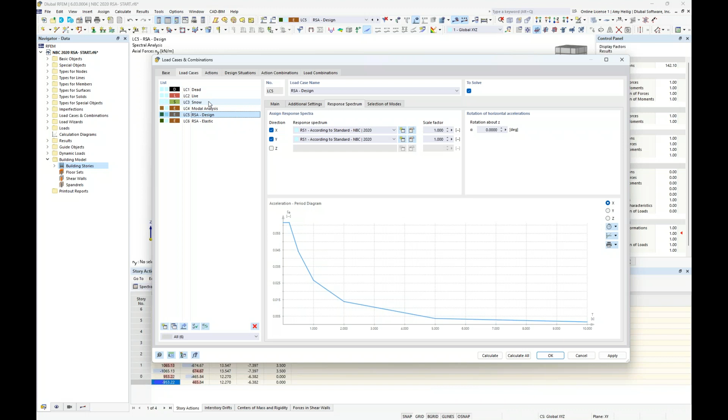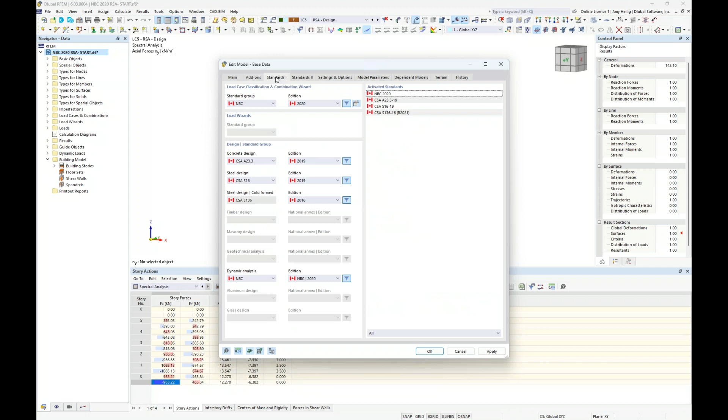Now, the final topic to cover is we now have our earthquake loads from this design response spectrum. How do we combine this with the other load cases such as dead, live, snow, or perhaps we have additional lateral loads like wind analysis? So if I go back to my base data, we probably would carry out the design here utilizing the concrete design add-on or the steel design add-on. Notice we have timber for CLT structures, aluminum, we have cold-formed steel, whatever it may be. And under the third tab now, we get some additional options to carry out this design specific to the CSA standards for both concrete and steel.

Now, again, I have previous webinars that are dedicated to these particular topics. So you can refer to those on our webinar and YouTube channel within our website. But for today, I just want to briefly show that we would probably, again, carry out the design of our structure utilizing these design add-ons.

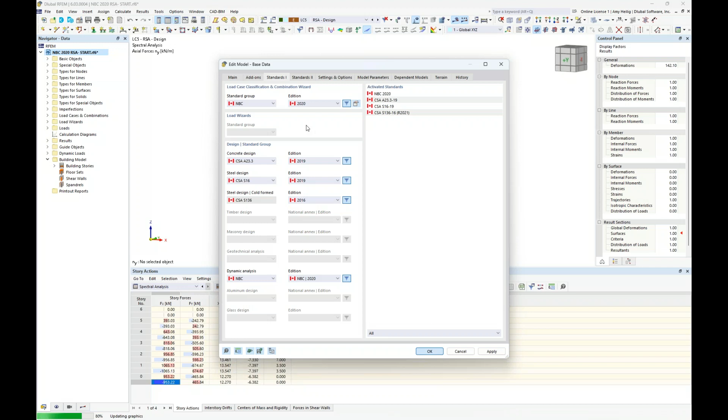Well, if we go back to the load cases and combinations, and we take a look at the design situations. Again, I had mentioned that the program will automatically create these two design situations, and we'll go ahead and activate them for the ultimate limit state and serviceability limit state that we'll eventually use within the concrete and steel design add-ons. That's why they're both checked here. If we take a look at the load combinations that are generated from these two design situations, you'll see here that I don't see earthquake listed at all.

And the reason why is because these load combinations are being generated according to a nonlinear second order analysis to consider those P-delta effects. But we know that we cannot simply add the earthquake loads to these additional load cases using superposition, because we can't combine second order effects and just add them together like P-delta.

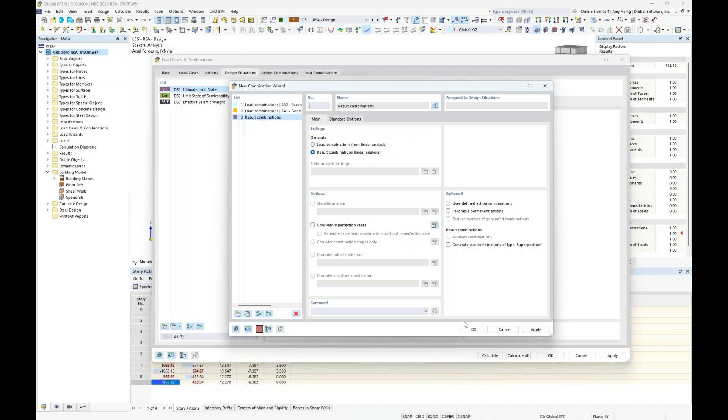So instead, we want to come in here for the ultimate limit state and go ahead and edit these settings here. Again, the default is set to second order analysis, but we're going to create a new definition type. And instead, we want to combine these earthquake results in a linear analysis using result combinations. So once we have selected this new definition type, we want to additionally select it here within our drop-down box for that ultimate limit state.

And now we get a new tab called result combinations. And sure enough, we see here dead, live, and snow, but we also see that earthquake load listed here from our response spectra analysis and the design. Notice also the sub-results. Currently, the scaled sums envelope will again reference the envelope solution from the 100/30% rule, 100% in the X, 30% in the Y. But if we wanted to consider one of these other scenarios, we could do so within the dropdown. But the default scaled sums envelope will take the max and min results here for this result combination.

We also see a second result combination with our elastic response spectrum analysis. And for this, we actually refer back to the NBC commentary 2020, and in particular, Appendix J, Note 111. And the commentary tells us that earthquake loads are considered rare. So there are no general requirements for SLS design when considering earthquake. Rather, we take a look at the specific elastic response spectrum analysis to make sure that our drifts, in particular under only earthquake loads, are limited according to what the code has set. Therefore, I really don't need to include this in my load combinations as well.

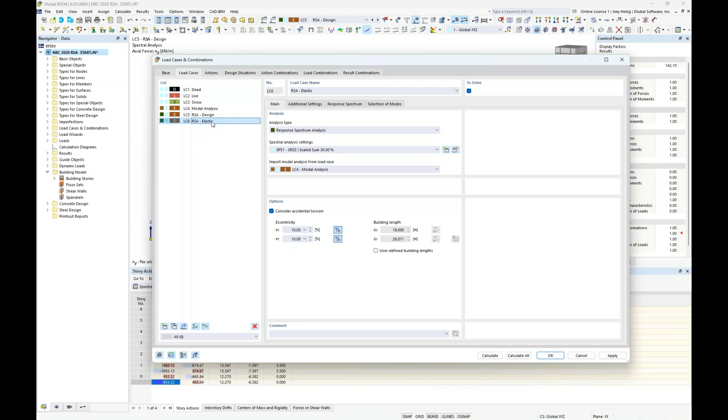So I certainly could go back to the load case and just uncheck the To Solve, but probably the better option under actions is you'll see here a separate action category assigned to my response spectrum for the elastic type. I can uncheck the active here. And now under my result combinations, we only have a single result combination considering that design response spectrum analysis.

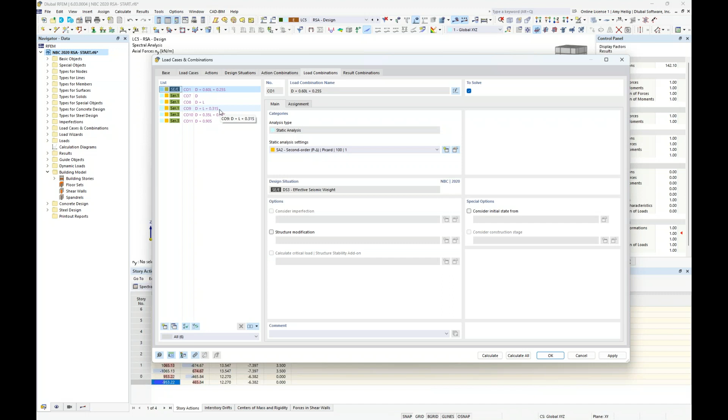When it comes to SLS design, we see here our design situation for SLS design. This is set according to second order. That's probably fine because we are able to combine now for our load combinations for SLS for dead, live, and snow. But again, for the ultimate limit state or ULS design, we can't do so with a response spectrum analysis. We must combine them linearly.

Okay, so that will conclude our presentation today.